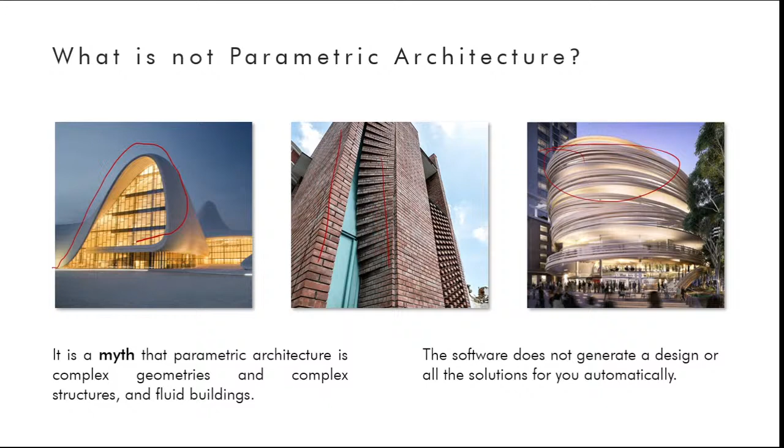Let's begin by understanding a little history here - the evolution of architecture versus other fields. We as human beings began to find shelter; architecture is as old as human beings. We started finding shelter by putting up rocks so it could protect us from harsh rain or sunlight.

Then we moved on to living in houses. We started putting up walls because we needed privacy. Then we started living in neighborhoods because we are social human beings. Once we started living in neighborhoods, the land wasn't enough, so we started rising in height, building stories over stories.

And that's how low-rise and high-rise buildings came into existence. There were many styles I don't want to get into detail here, like minimalism, brutalism, and Le Corbusian style. These are styles you all must have studied in your history classes in architecture, so let's not get into those. Let's see what stage we are at right now.

We have moved through so many phases of architecture. We got to minimalism, and now we are at complex geometries, and we have skyscrapers. But the question is, are our buildings smart?

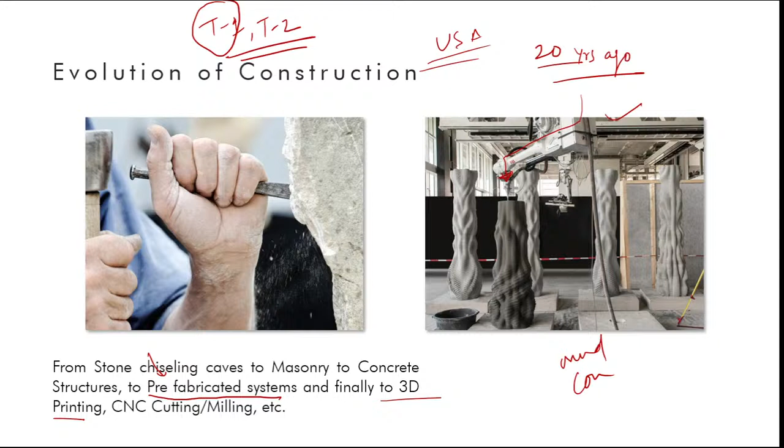To put it in generalized terms, think about how softwares and apps come out, how they are evolving. By the time I finish this webinar session, there will be multiple new apps and softwares already pushed out into the market to be tested by users. That's the pace of technology we are living in right now.

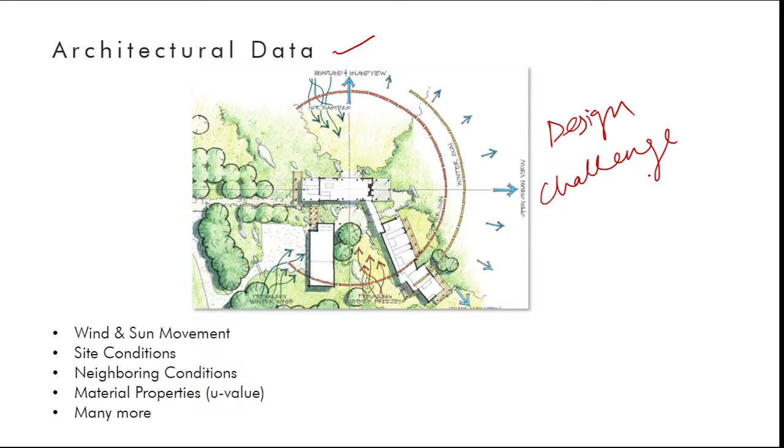So if I talk about architectural data, when we are presented with a design challenge or a problem, be it a live project or a college project, what do we do? We either visit the site, or if the site is hypothetical, we collect data. What is the data we collect? The wind movement, the sun movement, where is north, what is the groundwater availability, how is the soil bearing capacity, what is the site condition, how is the seismic activity, how do the neighboring buildings look and how are they designed, what is the visibility of the site from the road, and multiple other data.

What is the humidity? We collect all this data and begin the design process. After we have designed, when we move towards the construction phase, we start collecting data on the materials we are going to use. How much heat will the material absorb, how much will it give out, how would it perform environmentally, what is the carbon footprint, is it locally available or will it be imported from somewhere else? This list goes on and on, because architectural projects are very elaborate, as you all must know. There is a huge list of data that we collect throughout an architectural challenge or design problem.

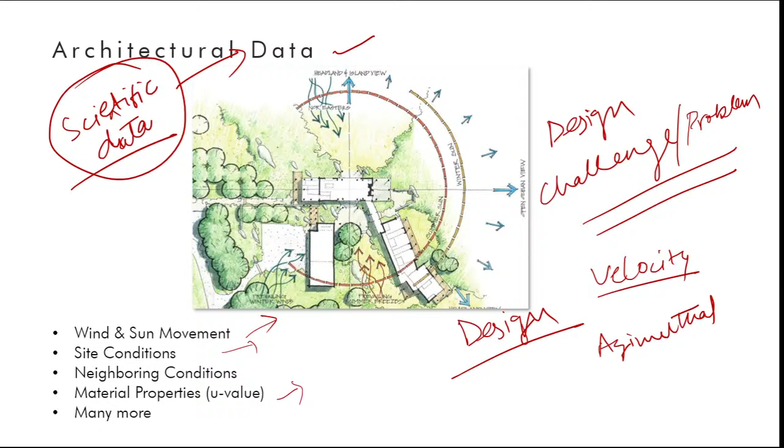So I'll circle back to this slide again. Let's understand what parametric architecture is. Parametric architecture is basically finding the simplest solution to a challenge or problem through objective evaluation of different data, like the data we collect throughout the challenge. Objective evaluation means evaluating something keeping subjectiveness aside, based on formulas and algorithms—objectively evaluating data and parameters like wind, sunlight, weather conditions, and coming up with the most optimized result. This is something really important. This is what parametric architecture is: to come up with the most optimized solution.

Optimization could be in terms of sunlight, wind, costing, or material usage. Coming up with the most optimized result is parametric architecture. Computation is generating solutions after processing this data using mathematical algorithms. Once you've done that, you spot patterns between the data, and finally you optimize your output based on all the information at hand, connecting the dots. That is what parametric architecture is.

To give you an idea, let's see what traditional practice has been so far and what parametric architecture changes. In a traditional workflow, we have a design challenge, and we collect all the data we just talked about. Then, as architects, we use our intuition, our experience, our subjectiveness, along with a list of requirements from the client, and there's some emotionality attached to it, and some psychological factors as well.

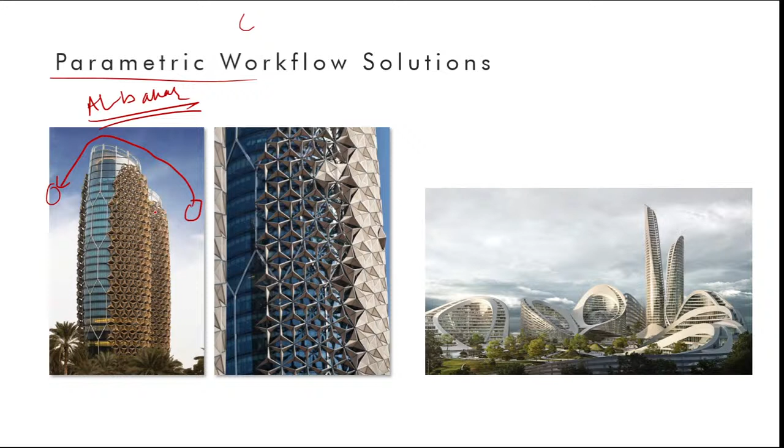Either they increase the cost of artificial or mechanical cooling, or they do something on the facade that cuts down the sun. So they simulated it and got to know which faces would be mostly exposed to the sun. So they designed a fenestration.

They designed sort of a brise soleil. So this is basically a hexagonal ring in which there are flaps that open up or close based on the sunlight. If the sunlight is direct and harsh, they close to prevent sunlight from coming in. And if it's indirect, they open up to let the indirect illumination come in. So these are called kinetic facades.

Now, I'm not saying the cost of operating this might be higher than mechanical cooling. What I'm trying to say is this is one step forward, one step towards the future. So we have to innovate this. We as architects have to take inspiration from it and innovate it further—how we can use something else, how we can make it better.

That's how cars came to be, at just first step. It was a cart, a bullock cart, a basic motor engine. Then gradually we progressed to a phase where we have luxury cars and the cars we see today. So it's an evolutionary process. Try to put yourself in that mindset that you have to evolve the entire architectural practice.

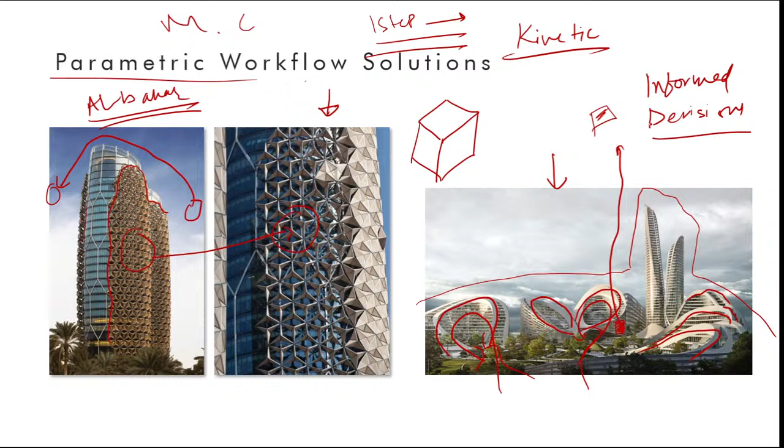Now imagine if this square area does not receive much sunlight. What the computer will do is, right at the designing phase, bring out this particular square region and tell you, hey architect, hey designer, this is not receiving the enough amount of sunlight you desired. Now it's your choice to move forward or change that. So maybe as an architect, you could plan some activity that is not very active during the day. This is how you make informed decisions—the biggest outcome is informed decisions. You are not just randomly guessing and making designs; you actually have the data to back that design.

That brings us to the last slide of this presentation, and then we move on to some practical aspects to see what Grasshopper and Rhino have to offer.

Let's talk about why architecture needs computational design. Why do we need it? There's something called multiple design iteration. I'm oversimplifying everything here—let's say this cuboidal elevation is the building. I could tell the computer to start trimming out this particular side at an angle until it reaches 60% efficiency in terms of solar radiation.

So what the computer would do is start making different iterations of this design, and it would say this is 10%, this is let's say 20%, this is 45%, this is 60%, and this is 80%.

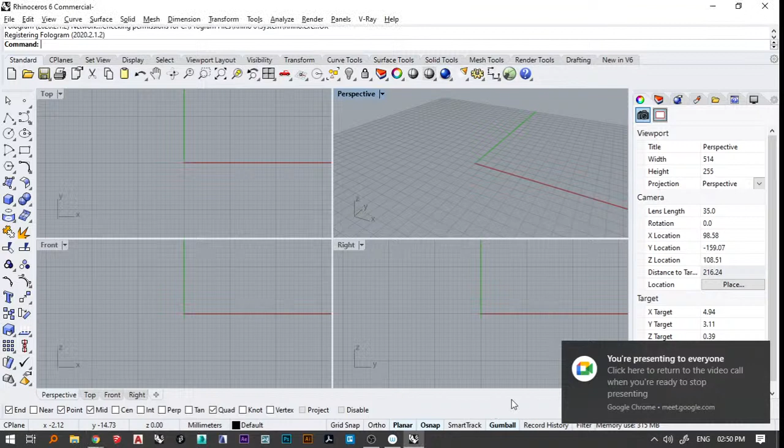So let's begin by understanding what is Rhino, why it is useful, and why should we prefer using it. What is Grasshopper, and what is the difference between other modeling tools and 3D tools and this particular tool here. So let me bring up a whiteboard quickly.

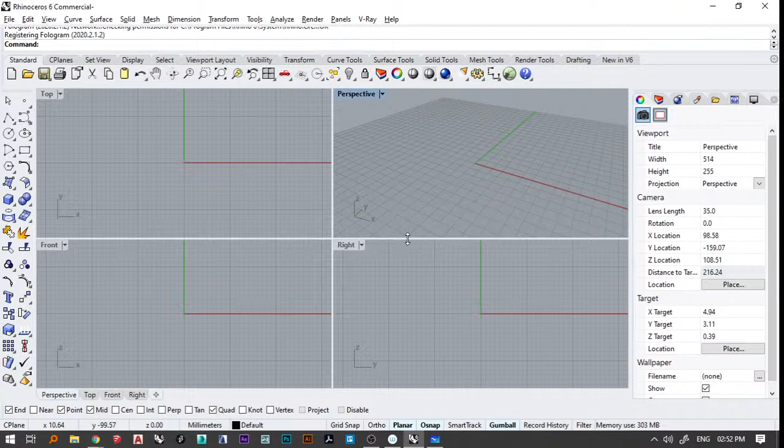These four blocks that you see - basically Rhino looks a bit complicated at first, a bit intimidating, but it is very easy because you can clearly see that we have curve here, and there are some options, and then you can also find the same options here. So basically everything is repeated multiple times - same options, same commands here, here, and here. That is why it looks a bit intimidating.

So we'll stay in the standard bar right now. These are called viewports where we visualize our geometry - top, perspective, right, and front. If you double click on any of the names, it maximizes. And then if you go to this particular point icon here and click on this arrow, you'll see multiple point options. We'll use the first and the second one.

So if you just type in point and hit enter, you can place some points on the viewport. Down here is the snap setting through which you could adjust snap just like CAD programs. So end, near, point, and all these things, and you could disable them altogether.

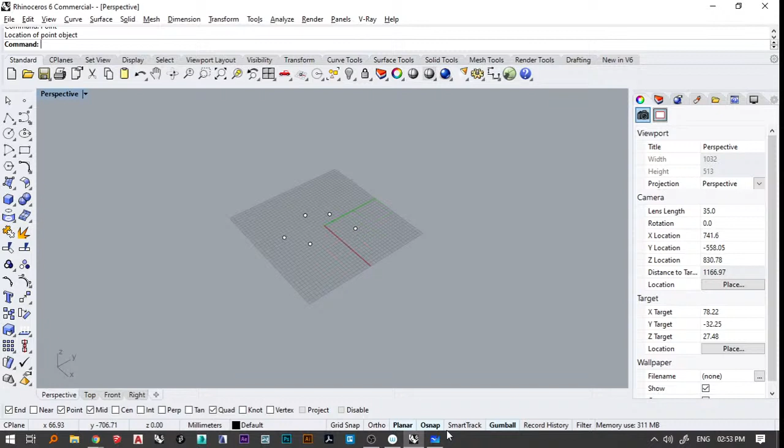Down here you see some other settings, and what I'd recommend is to keep this gumball on. Gumball is an important tool. So what gumball is, if you select something, if I turn this gumball off, you see the gizmo on the screen disappeared. If I turn it back on, whatever you select, it will give this gizmo.

So this is basically x, y, and z direction. This is z direction, this is x direction, this is y direction. You could drag, click, and drag on these arrows to move the geometry. You could also extrude them, you could also rotate it. So let's try all that out.

The second one here, and the third one here, is polyline. So just like PL entered in AutoCAD, this is a polyline through which you could construct or make a set of straight lines that are joined together. You could also type polyline for that.

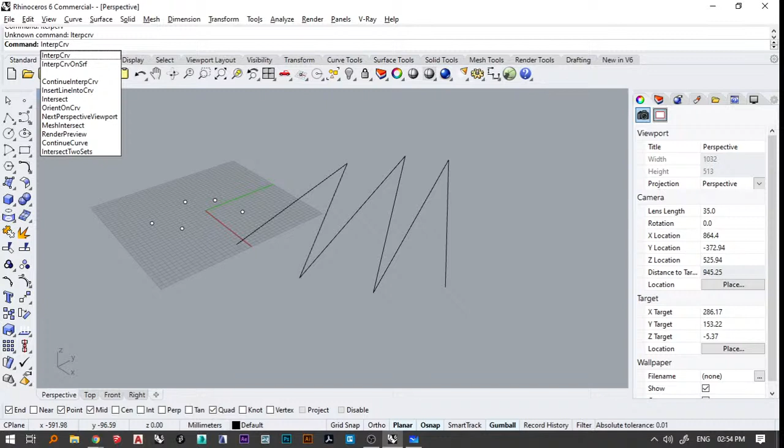And then there is something called InterpCrv, or interpolating curve. What InterpCrv does is it allows us to make some curves. So let me just make a curve here. Now you see, the fun part about this curve is whatever points I'm clicking, the curve is always passing through those points, right?

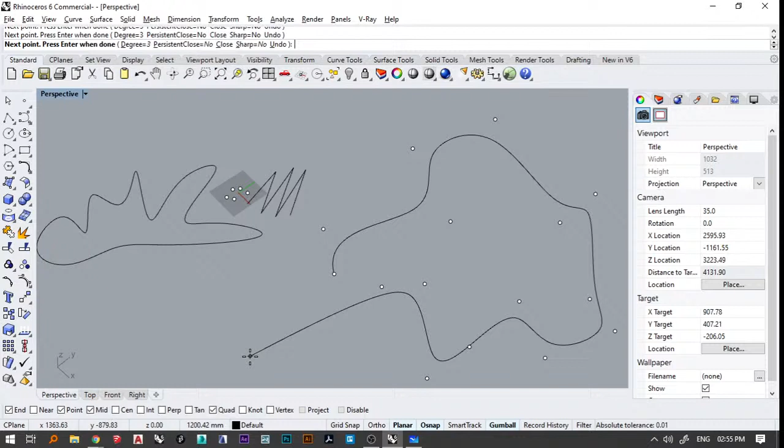And the second type of curve is NURBS curve, or instead of NURBS curve, you could just type in curve. What this particular curve does is, if you'll draw something, the curve will not pass through those points. Instead, it will be controlled through those points. So I hope you guys get the difference between a NURBS curve and an interpolating curve. Interpolating curve basically passes through the points that you make, and NURBS curve doesn't. It is controlled through those points.

Let's go ahead and explore a couple of more things before we move into the fancy technical stuff. Let's just have a look at all these things. So I would actually recommend you guys, once you are practicing after this session, go ahead and explore these options. These are some options to make circles and polygons and sort of these sphere, ellipses and arcs, rectangles and triangles.

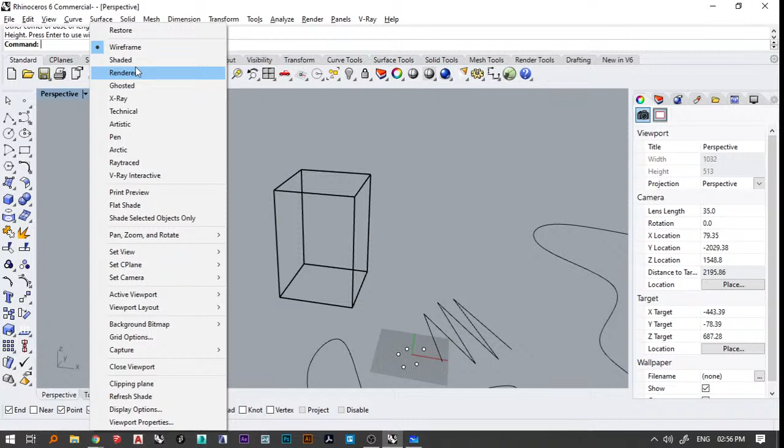So the first one here, if I click on this one here, you see I can make some 3D geometry, and we can change how this 3D geometry is looking by clicking on this arrow here, and we can change the style of preview. So we can either set it to wireframe or shaded or rendered or ghosted. For now, I'm just gonna set it to shaded.

If I talk about this particular geometry here, I can go in here and make some cylinders and make some different shapes. So let me make this. So I made a cuboid along with a sphere.

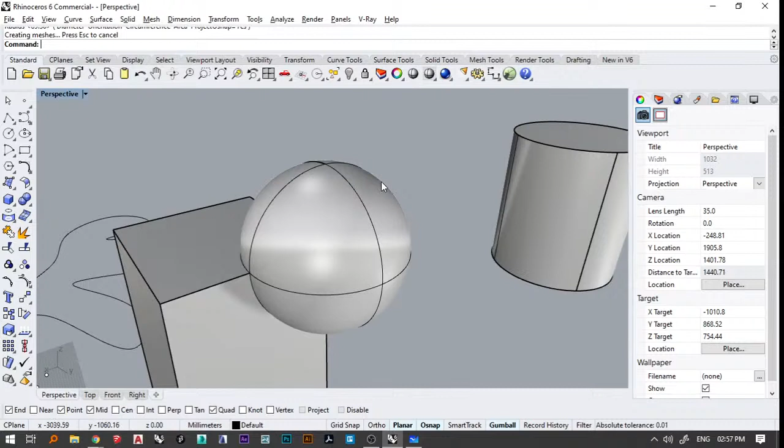So then there is some command here through which you could, right now this is a different geometry. This sphere is a different geometry, and this cuboid is a different geometry. What if I wanted to combine them together? What if I wanted to subtract this sphere from this cuboid?

So to do that, there is this Boolean difference option that I would actually want you guys to explore. This is not parametric, this is some basic modeling tool. So Rhino is a 3D modeling tool just like SketchUp or any other 3D modeling tool, but it is a bit more sophisticated. You have a bit more control over the geometries that you're making. So that is the difference between Rhino and any other 3D modeling tool. So I would encourage you guys to actually explore these tools.

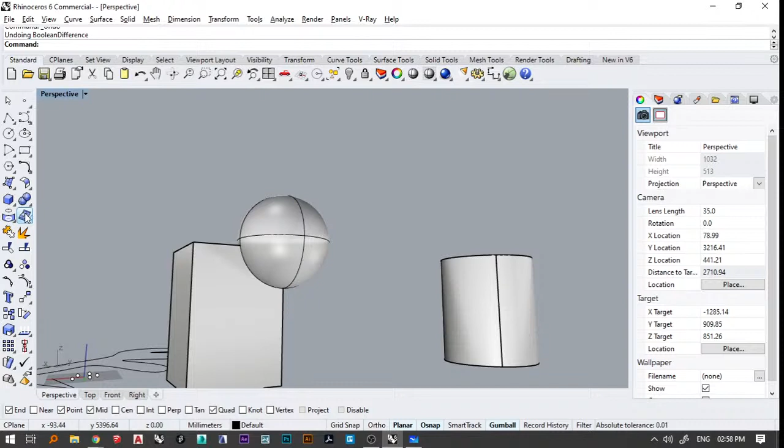So let's say if I type in Boolean difference and I select this cuboid and hit spacebar or enter, and then select this sphere and hit spacebar, you see it has kind of removed that spherical surface from this cuboid. If I press Ctrl Z, it will just undo it. And I can combine them, I can do a Boolean intersection. I would actually encourage you guys to try these out once this session is over.

Let us see a couple of interesting things first. So you can select every geometry, all the geometry, move it aside, and after selecting it, you can also hide it. In order to hide it, you can click on this light bulb option here, and if you right click on it or click this one, it brings everything back on. So I'll just hide everything so that it does not interfere with what we are making right now.

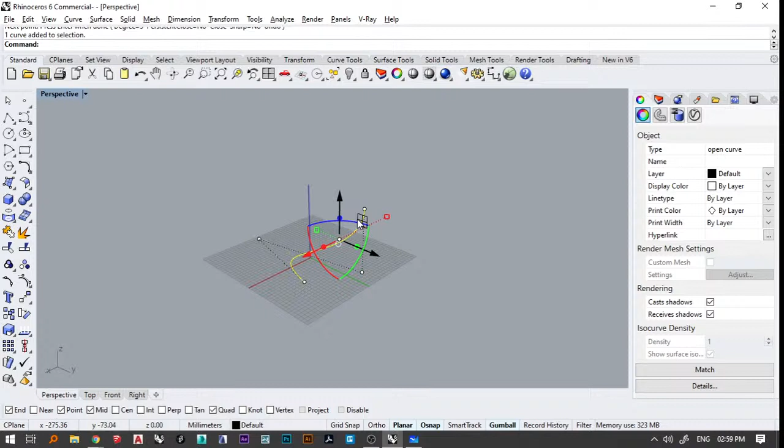So let me go ahead and make a couple of curves. This is a curve that I just made, and I'll make a copy of this by pressing and holding Alt and moving this particular curve. So now I have these two curves. What if I wanted to make a surface between these two curves?

Let's go back to the drawing board again. I'm trying to break down the complexity of what curves are and how they perform, and what is 3D geometry basically.

Imagine a surface like a piece of fabric, either you wear it like a t-shirt. How does the fabric look? It has threads that are weaved in both directions, right? So similarly, no matter whether you wear it or throw it on the couch, whatever you do with it, it will take that shape.

So similarly in 3D tools, particularly in Rhino, these threads are called - this horizontal one is called U, and the vertical one is called V. This is very important, U and V. So what if we had to make a surface between two curves?

So if this is a curve and this is a second curve and we want to make a surface between them, what the computer does is it breaks down this curve into parts and starts numbering them. The computer always starts numbering from 0, so it will say 0, 1, 2, 3, 4, 5, and 6, and similarly it will break this curve into multiple parts and label it 0, 1, 2, 3, 4, 5, and 6. Then it will connect 0 with 0, then 1 with 1, 2 with 2, and so on and so forth.

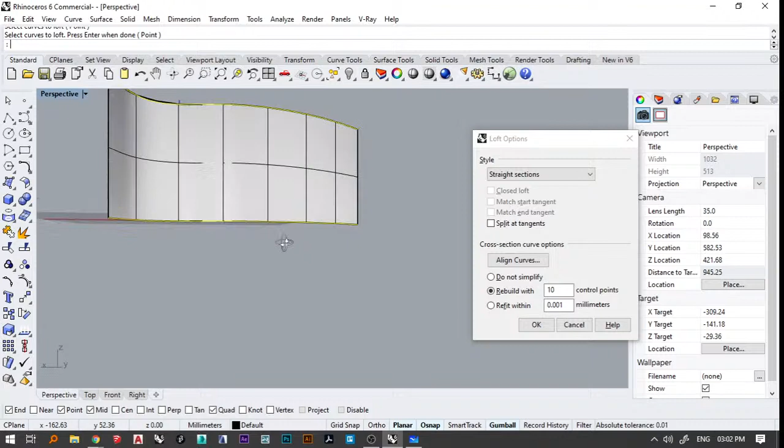So let's try to do that on Rhino. What if we wanted to make a surface between these two curves? There's a command called loft. If I type in loft, it asks me up here on top to select curves to loft. So I'll select this curve and I'll select this curve. And if I press spacebar, you see it has made divisions and joined these curves together. I'll say do not simplify and hit OK. So very easily I made a curvilinear sort of surface.

Let me go ahead and quickly make one more curve, and let's try to make something interesting this time. Imagine if this is a curve, and let me make a copy of it, and I'll change how this curve is in its form. So let's make a lofted surface between these two curves. I'll type in loft, hit enter, I'll select this curve and press spacebar, and there you have it. So you see, you can make very organic and smooth, fluidic shapes very easily in Rhino.

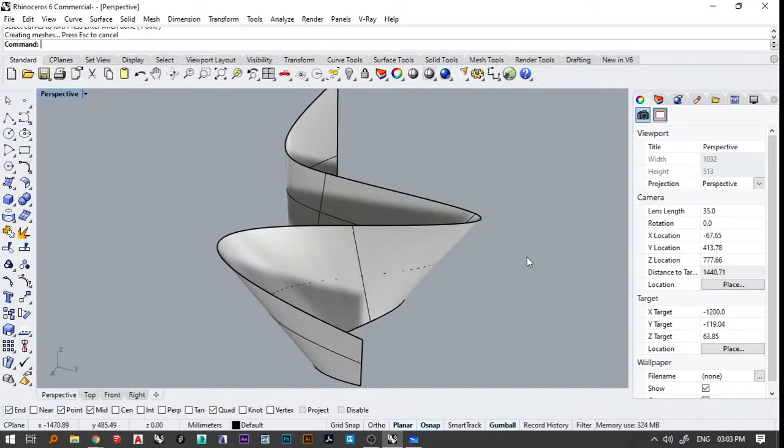But the only problem is, if I go back and select this curve and change the shape of this curve again, the surface won't automatically update, because this surface is a different unit and these curves are a different unit. So I'll have to do the loft again. And this is what changes with parametric architecture or with computational design.

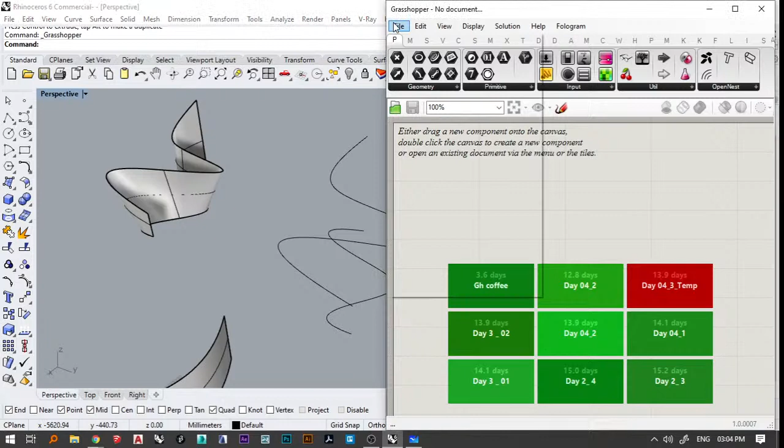So enter Grasshopper. Let me go ahead and quickly launch Grasshopper. So this is Grasshopper. Let me introduce you guys quickly to what Grasshopper is. This rectangular boundary that you're seeing here - let me increase this pen size - this is called the canvas.

So you draw or you make everything in here. Grasshopper is a visual scripting software, a plugin that is very tightly incorporated with Rhino. So whatever you make here on Grasshopper, it is previewed in Rhino.

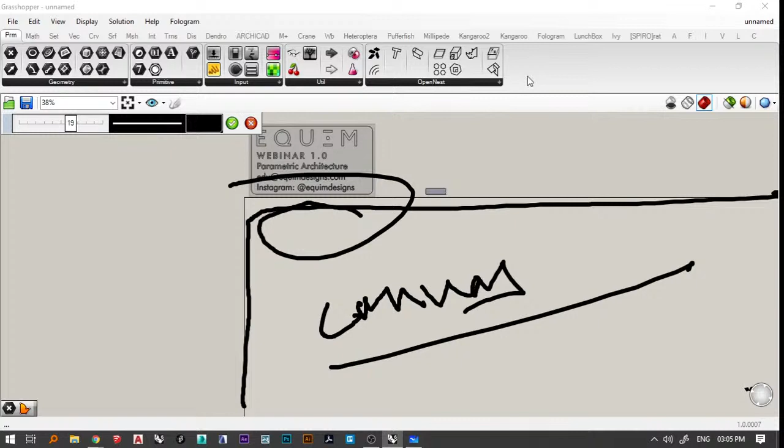Where my cursor is right now, these are called components, and you might not see this many components on your screen because I have many plugins installed. That's why I have these many components. Let me go ahead and drop in a component here.

You can double click anywhere and type a name of the component, say point or a line or anything, or you could drop it from here. So if I double click and type in point, it will bring up the same thing.

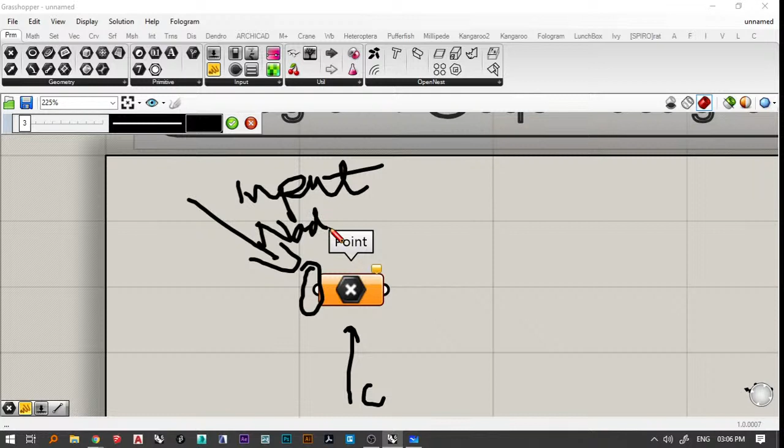Now let's understand what this is. This is known as a component. Component. This here is input node, and this here is output node. So we always connect output of one component to the input of another component.

And it will all make sense in just a bit. So I'll just keep it somewhere here, aside, and I'll also move this geometry aside and hide it.

So what can we do in Rhino? What can we do in Rhino and Grasshopper combined? So if I make a couple of points in Rhino itself, let's say these are 4 points that I just made in Rhino.

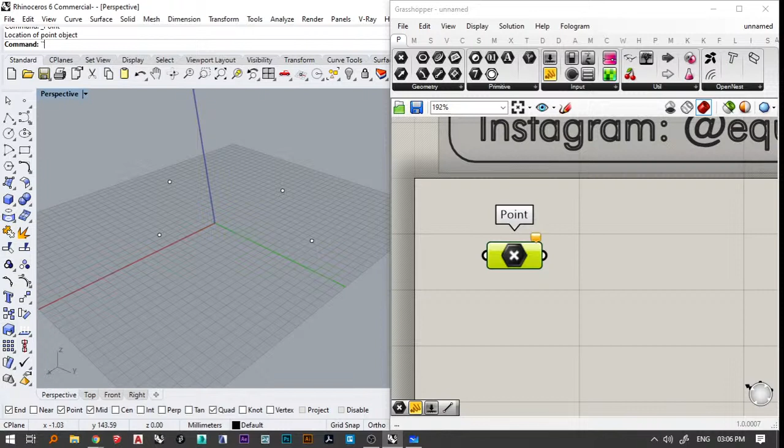Now there is something that means with the color of the component. If the component is orange, that means the component is empty. You can click on this balloon here to see what is the error. So it says floating point parameter point failed to collect data, because we did not specify any point in this particular component. That's why it's orange right now.

So all these black icons that you see here, they are used to reference something from Rhino to Grasshopper. So let's bring these points here in Grasshopper. I'll right click and I'll say set one point.

As soon as I click on set one point, the Grasshopper screen disappears. Now I can select a point here, and as soon as I do that, it will bring up the Grasshopper screen back again.

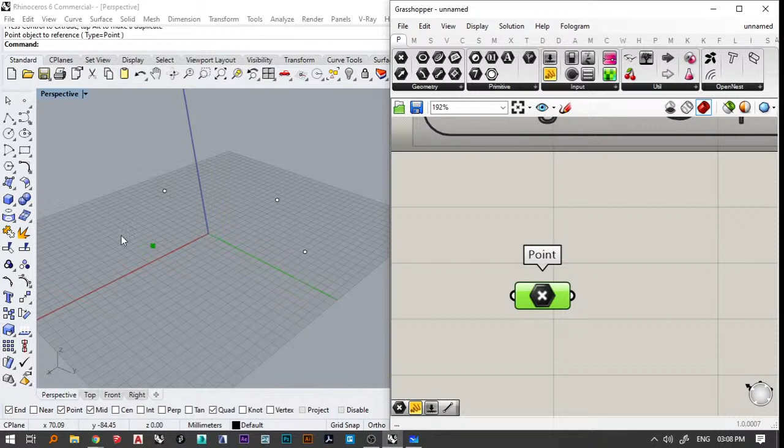So this is a point. Now you see there is a green mark because this component is now green in color. That means it's running fine, it has some data in it. And if I select it, you see this point here turns green.

And I can move this point in Rhino, and it will automatically update the position of Grasshopper's point. So let's see what we can do out of it.

So there is something called panel. Panel is used to check the output of these components - what is it giving? Because we cannot see any geometry preview here, right? We can only see it in Rhino. So let's see what it has in it.

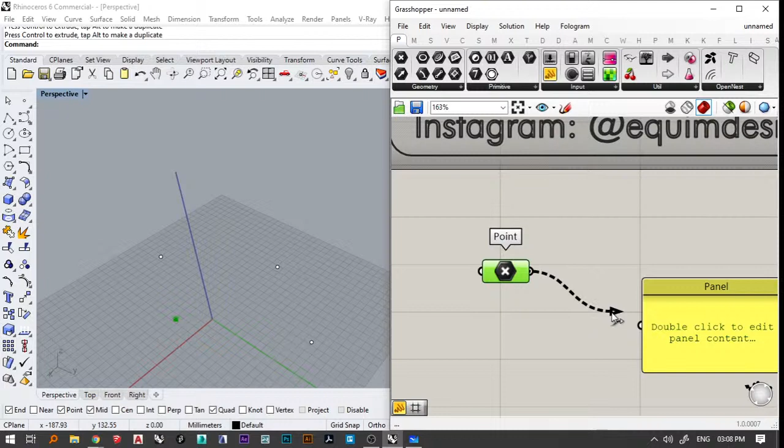If I drag a wire out of it, so you just click and drag, a wire comes out. So if you connect it like this, it says referenced point. Why? Because we referenced one point from Rhino.

Let's quickly reference another point and make a line between them. So I'll again type in point, right click, set one point. I'll select another point, this one.

Okay, let's also check the output of this one. It also says referenced point. So this one is the green one here, and this one is the green one there. So let's make a line.

So if I double click and type in line, I won't use this black one because black components are used to reference something from Rhino. I'll just use this line here.

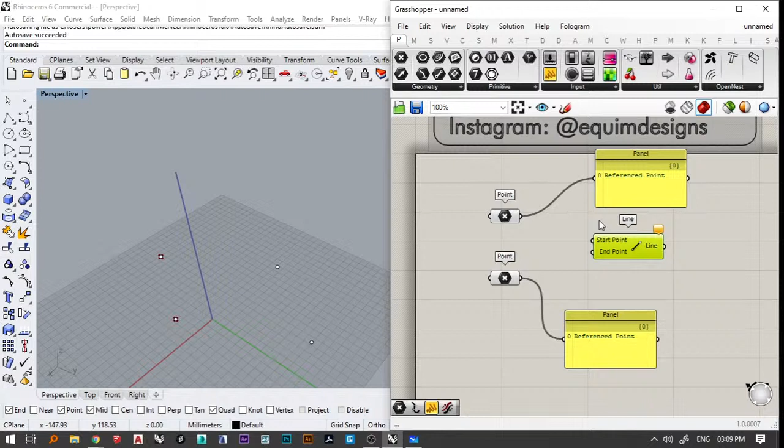Let me go ahead, and now you see what does a line require. What does a line require? It requires a starting point and it requires an ending point, right?

So I want to make this point as the start point, so I'll just drag an output and connect it here. And I'll drag an output from here and connect it here. As soon as I do that, you see a line is being made, right? A line on Rhino, I can see a line on Rhino.

And again, if I move this point in Rhino, the line also automatically updates based on the position of these points. Correct? Let's check the output.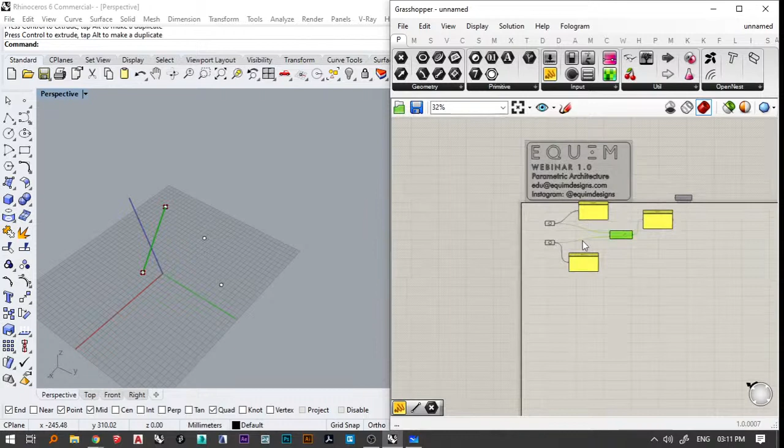If I connect this line here in the panel, you see it tells me that it is a line that has a length of 196 units or 196 mm. Why mm? Because down here on Rhino, the unit is set to millimeters right now. Okay, so this is a line. I made a line. That's cool. Let's try to make some curves.

So I'll just type in point. Now again, it would be very tedious if you had to select all the points manually one by one. So you can right click and select set multiple points. As soon as you do that, you can select multiple points in one component. I selected these 2 points, and when I hit space bar, both get highlighted in green as soon as I select this component. So this one has the first point, this one has the second point, and this one has the remaining 2 points.

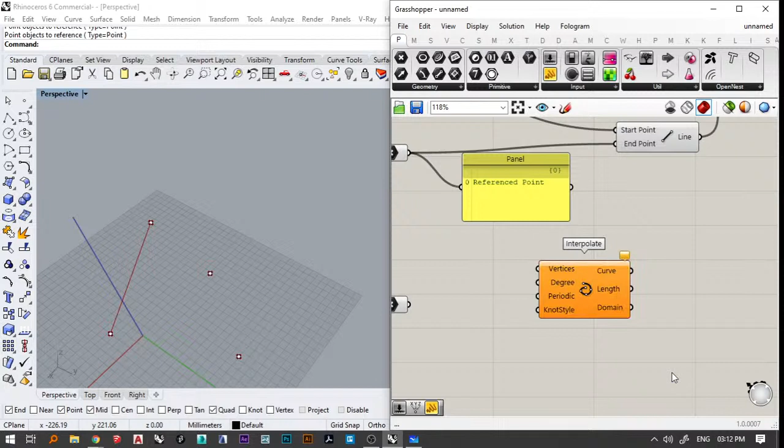Let's try making a curve between them. In order to do that, let's make a curve. Let me type interpolate. As soon as I type interpolate, I get this curve. If you hover over it, it says create an interpolated curve through a set of points. So now we have some points, right? We have like 4 points with us.

So how about making a curve between them? What we'll do is connect this first point in the vertex here, and as soon as I do that, this turns red. Red means there is some error, something wrong with the component or the input. If I click on this balloon, it says insufficient interpolation points for a curve. That means we only gave it one single point right now. That's why it turned red. It cannot make a curve between one single point, right? It needs at least 2 points to make a line curve.

So let's connect this second point as well. I'll turn the preview of this line off by middle clicking on it and choosing this blindfold icon. But you see, as I try connecting the second one, the first one automatically goes away. If I connect this first one back, the second one goes away. So to connect multiple outputs into one single input, you press and hold shift. As soon as I do that, a plus sign appears on my cursor.

Yeah, exactly. Very nice. So the first one is an interpolating curve. It will always pass through the points, and the second one is a NURBS curve. It will be controlled through those points.

Let's try making a surface between them because we learned to make a surface between two curves. Let's try doing that in Grasshopper. If I double click and type in loft, it is asking me for curves. I want to make a surface between this curve, the one you see in green right now, and this one. So let's connect this curve in here, press and hold shift and connect this curve. As soon as I do that, I have a surface.

Now when I'm changing the location of the points, the curve is getting updated, and at the same time, the surface is also getting updated. If I check the output, it will say an untrimmed surface. That is the power of computational design. You never lose control. Just like layers in Photoshop, if you work in layers, the data is not destroyed. Similarly, in a way, we work in Grasshopper.

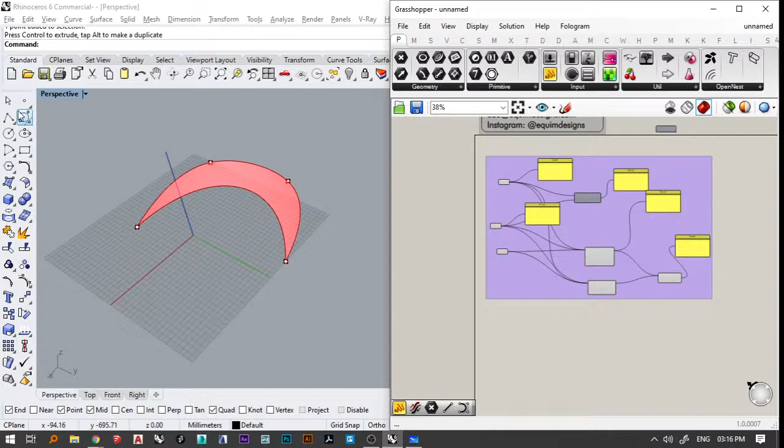So let's try to make something more advanced. Let me go ahead and make a curve in Rhino itself. Say this is a curve. I'll make a copy of it and alter the shape a bit. I'll make a second copy of this as well. So let's make a lofted surface between three curves this time instead of two.

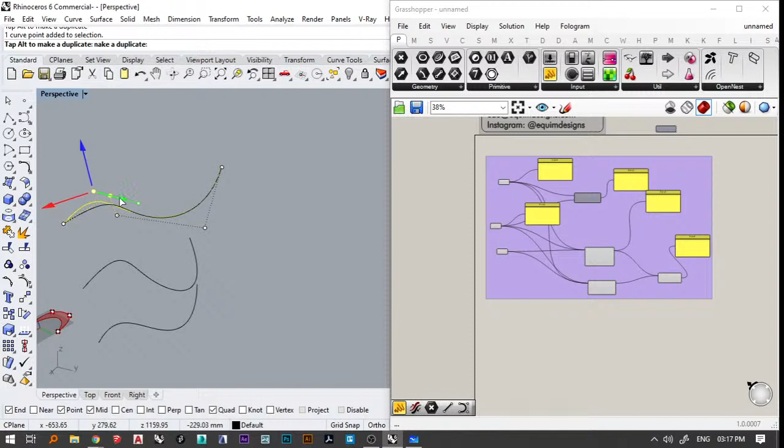Okay, let's try making a surface between these three curves. In order to bring these curves into Grasshopper, I'll double click and type in curve, and this black component appears. I can use this to reference curves from Rhino.

I'll right click and say set one curve and select this curve. You see this particular curve is selected. I can press Control C and Control V to make a copy of this same component. In this one, I'll say set one curve and select this middle one, and in this one set one curve and select this one. I could also have done set multiple curves and selected all at once, but for the sake of this example, I'm using three different ones.

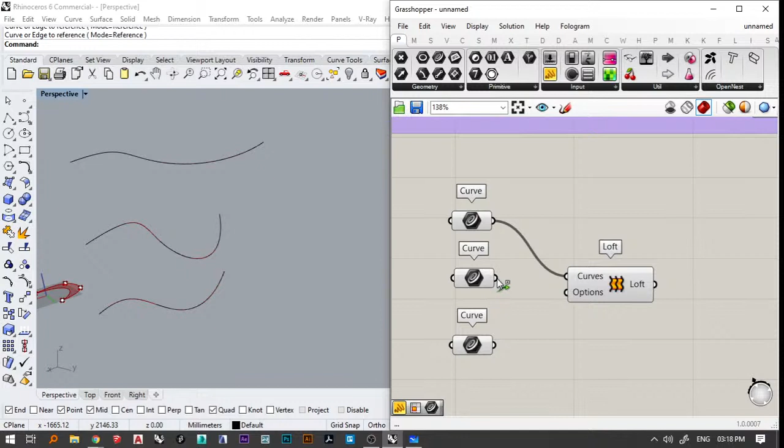So if I double click and type in loft, and connect this, then press and hold shift and connect this and this, you see I have a very smooth fluidic shape. Let me change the preview style a bit. Fluidic shape in here.

Now if I select these curves and change the curve, the surface automatically updates. So no matter how many times I change something, it will automatically update because I made an algorithm like that, right? I could even change the position of this entire curve.

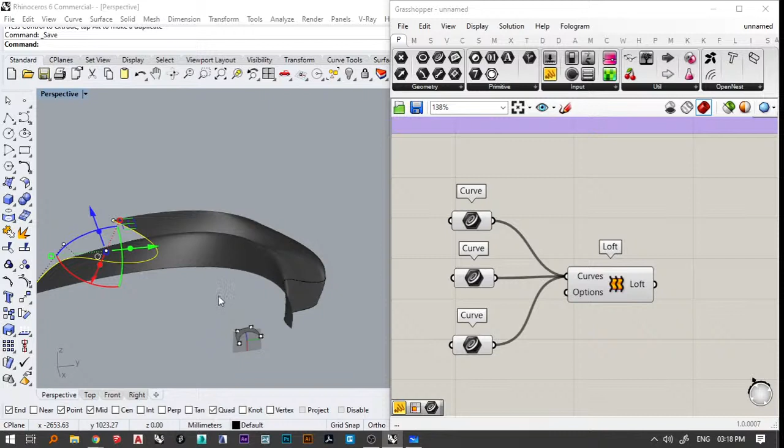Okay, let's move forward and see what else can we do in here. If I check the output here, you see it says an untrimmed surface, right? What can we do out of it? How about...

Say we have a surface like this. How about dividing it into panels and then doing something on each of these panels? Let's try doing that.

So let's divide this particular face or surface. In order to do that, I'll double click and type in surface here. I'm just trying to sort the script - it's a left to right approach. You see, it can get messy pretty quickly if you do not keep organizing it nicely, because there are so many wires that come from here and there. So keep organizing your scripts. I'll connect this loft into this black component here. Now I have this surface here.

Let's divide it. In order to divide, there's a component called Isotrim. What Isotrim does is it requires a surface that it can divide, so I'll connect this surface here. And then it requires the information of how to divide it - how many divisions, how far from one another, and basically how to divide it.

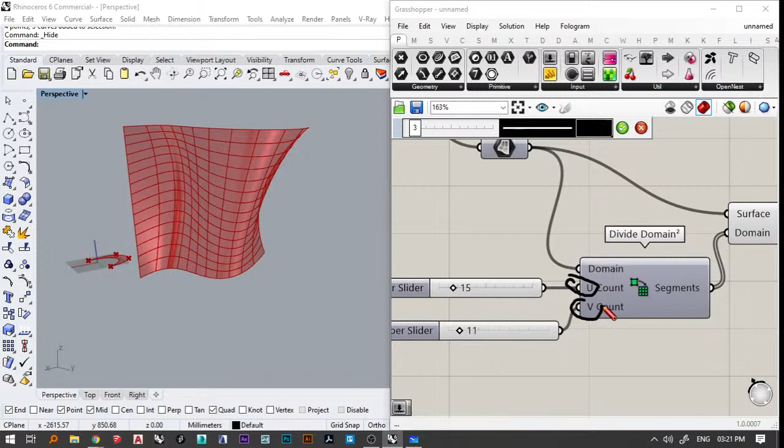If I zoom in, you see if I change this number, I can adjust the number of divisions on this surface. So let me say 15 by 11. Again, there is U count here and V count here, as we learned before. Also, this is a kind of a thumb rule: Isotrim and divide domain square, they usually go in together, always.

Now if I check the output from here, it was one single surface, right? This entire surface was one single surface. Now if I check the output from this Isotrim, you see I have 165 surfaces. Why 165? Because 15 into 11 is 165. So now it is no more one single surface - it is rather 165 individual surfaces. So we just divided this surface.

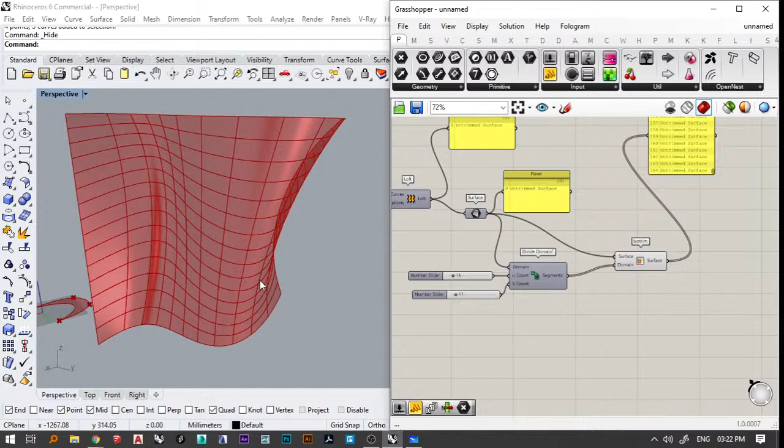Okay, let's move forward and see what else can we do here. Right now, we do not know what is the center point. Let's say if I draw, let me change the ink color and draw this one, a blow up of this one. Let's name it, let's say 21. So this is 21 - we don't know what is the size of this, right? We also don't know where is the center point.

And we also don't know what is the normal direction - the normal direction is basically the perpendicular direction. So the geometry could be oriented in any way, right? The entire panel could be oriented in any way, so we do not know what is the normal direction as well. So in order to get that information, there's a component called evaluate surface.

Let's go back and use this component. So if I double click and type in Evaluate Surface, now you see it is asking me for a surface and a point. So I'll connect this surface here, and there is something called an MD slider.

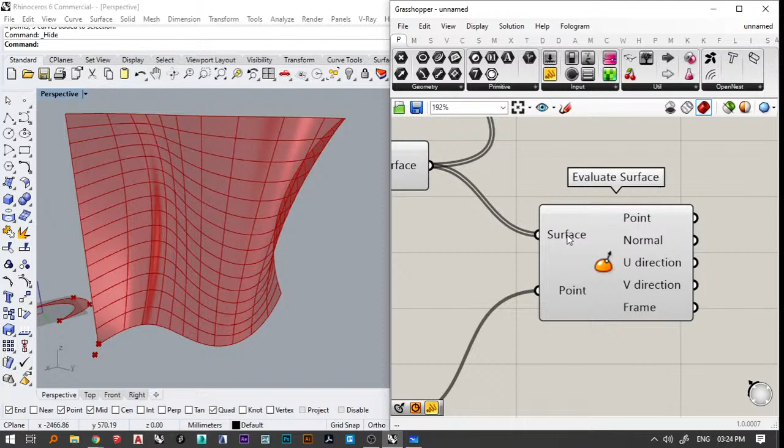I'll connect this MD slider into this point. And what I'll also do is right click on this surface and click on reparameterize - I'll explain what reparameterize means in just a bit. So always remember that MD slider and evaluate surface go together, and you always reparameterize it. Always, this is a thumb rule. You always reparameterize it.

So now let's understand what reparameterizing is. Reparameterizing is basically nothing complicated. Imagine if you had a rope, and the length of this rope starts from 0 and goes up till 20 units. So somewhere here in the center must be 10, somewhere here must be 5, and somewhere here must be 15.

So now if I reparameterize this surface - let's call it a rope - what it will do is take the entire rope, and it will take the same length of the rope. It won't change the length of it. It will only change these numbers for us to make it easier.

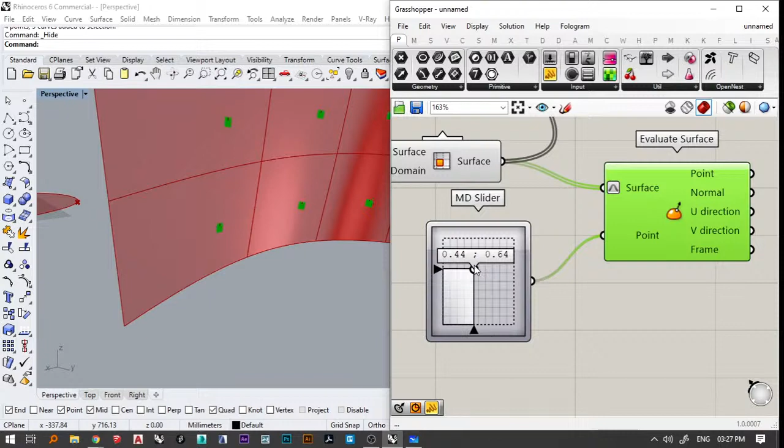So when I reparameterize it and connect an MD slider, you see this MD slider goes from 0 to 1 comma 1, and based on its location - let's talk about this panel here - if I bring it here, you see the point comes right at the center starting point, and then I can adjust where it goes through this particular graph. So this is what reparameterize does.

Let's move forward, and let's make some circles on this particular surface here. So in order to make some circles, what we can do is double click and type circle. Again, this black one would be used to reference something from Rhino, and this one would be used to make something in Grasshopper - so I'll use this one. Now it is asking us for a plane and for a radius.

So what does a circle need? If we have to draw a circle, what does it need? It needs a center point, and it needs a radius, right? So that is what it is asking us, a center point and a radius.

So Evaluate Surface is giving us points, the center points, and the position of these center points can be controlled through this MD slider here. And if I actually go ahead and check the output from this point, you'll see these are coordinates basically - points have coordinates, right? X, Y, Z coordinates. So that is what these coordinates are.

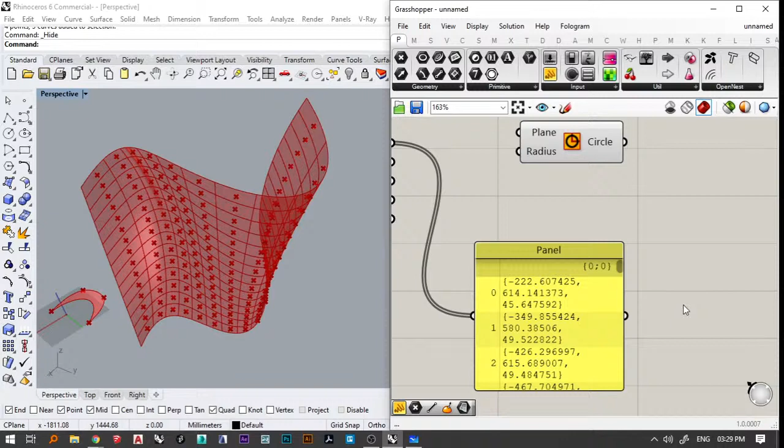So now irrespective of length and breadth, we can make some points on these surfaces without caring about how big the surface is, how it is oriented in 3D space, how it is performing in 3D space. We can just directly use Evaluate Surface. It makes our lives easier.

I'll change the number of divisions a bit. Okay, this looks fine for now.

Okay, so if I connect this point here, and double click and type in 15, and connect this radius here—probably 15 is a very small number. Okay, so now you see it has made circles at each of these points, right? It has reduced our labor, and it has made these points at each of these center points.

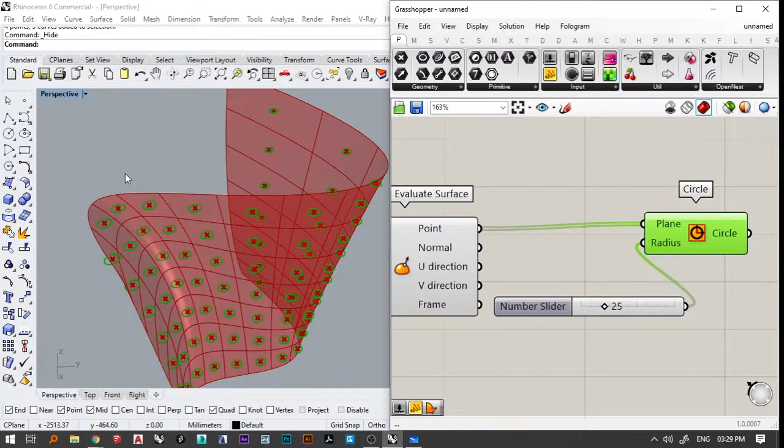What can we do further? What can be done further? So right now all of these circles are intersecting this surface. They are not on the surface, rather they are intersecting it. So how do we change that?

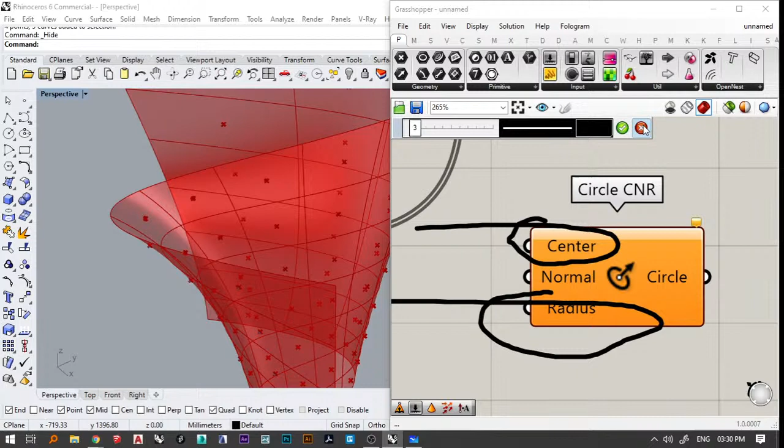So I'll just select it and turn the preview of it off. There's something called Circle CNR. What Circle CNR means is it requires a center, it requires a normal direction, and it requires a radius. So we already know what center is, we already know what radius is. Normal is basically the direction.

So you see evaluate surface here is giving us the normal direction, so we can connect this normal here directly. So if I connect this point in center, if I connect this normal here, and connect 50 in the radius, let's see how that looks.

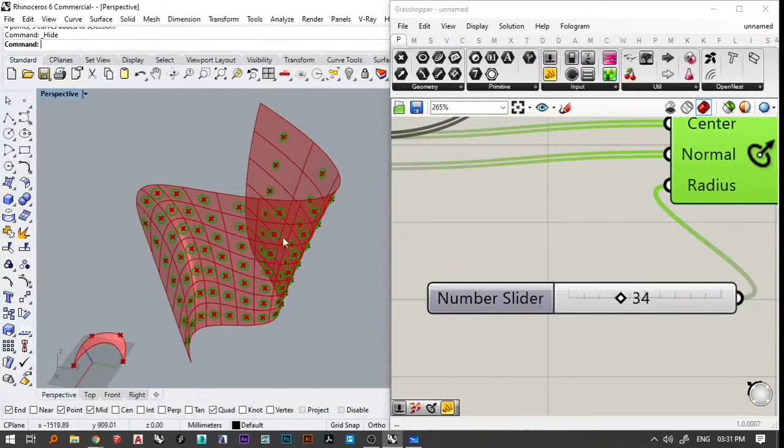Okay, that's a bit much, so I'll reduce it. So now you see that I have very easily drawn circles that are right on this surface, laying flat. And again, if I wanted to extrude them, I could simply use a command called extrude.

And I can connect this circle in base here, and in direction I could give it a direction, so I'll just use the normal direction. Normal direction is basically 90-degree from this surface.

Normal, basically 90-degree from this surface. I'm getting a normal output from this evaluate surface. I'll use this only. So there is something called amplitude. If I use amplitude and connect this normal in vector here, and connect a unit of 20 and connect this vector in direction, I can very easily extrude these circles into cylinders.

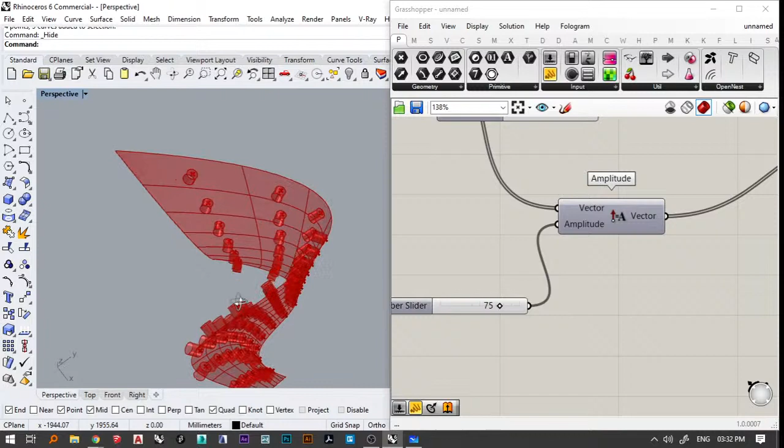Let me change the preview style, and I'll give a quick recap here. I know in the beginning it is a bit complex to grab on to Grasshopper, but once you get the algorithm, it's fairly simple.

So this normal is basically giving me the direction of the normal—what is the direction of the normal at this particular surface here. And this amplitude is controlling the length of that normal, how far it should extrude. So you see I can control the length from here, and this is extrusion.

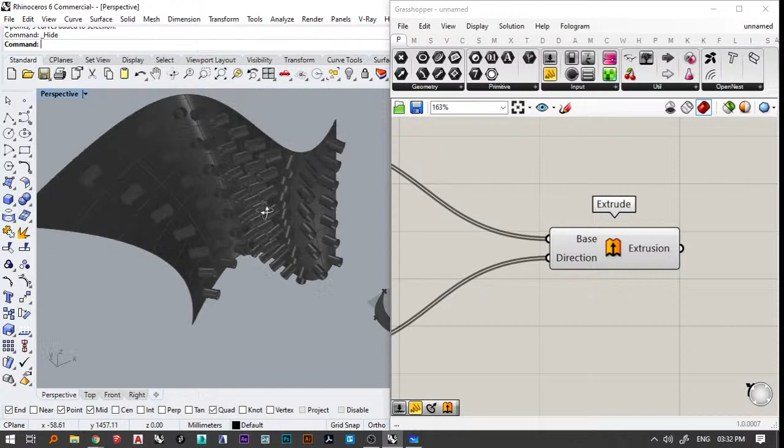So the fun thing is if I change the preview style here, and if I turn all the geometries back on, and if I go back in Rhino and change the shape of this curve—you see, I'm going back right to the first stage, and as soon as I change the shape of the curve, everything automatically updates, from cylinders to the shape of the surface, everything automatically updates.

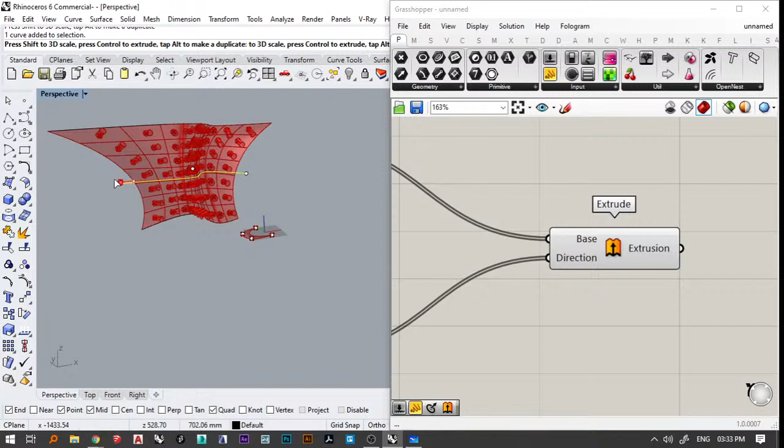So let me show you how easily I can control it, and I can always go back and change the number of divisions. So if I change the number of divisions, you can see how the number of circles automatically increase, right? So this is the power of computation.

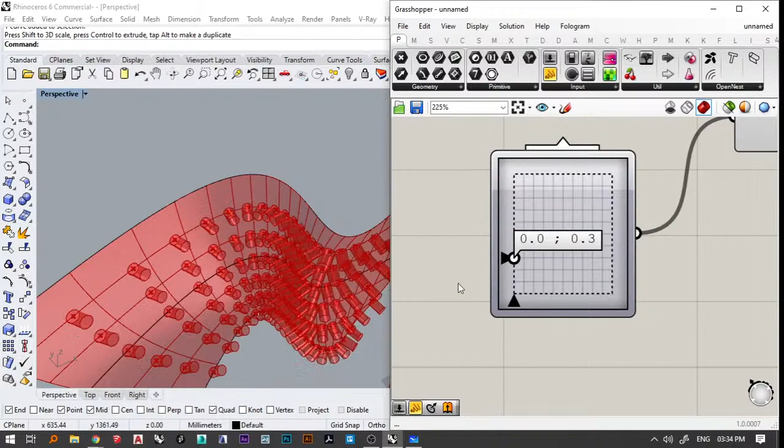You never lose data. You can always go back, change anything. I can move this MD slider to change the position of the center point, and I can move these cylinders here and there. Or I could go back to circle and increase its radius.

I could change how this particular number slider operates. So let me give it 150. So if I plug 150 here, you see I can change how far they are getting extruded, right? So this gives us an extraordinary power.

Now imagine this was a facade. I'm not—I mean, this is very early to move to facades, but imagine if this was a facade and you had to design some openings on it, circular openings on it—you could do that through this.

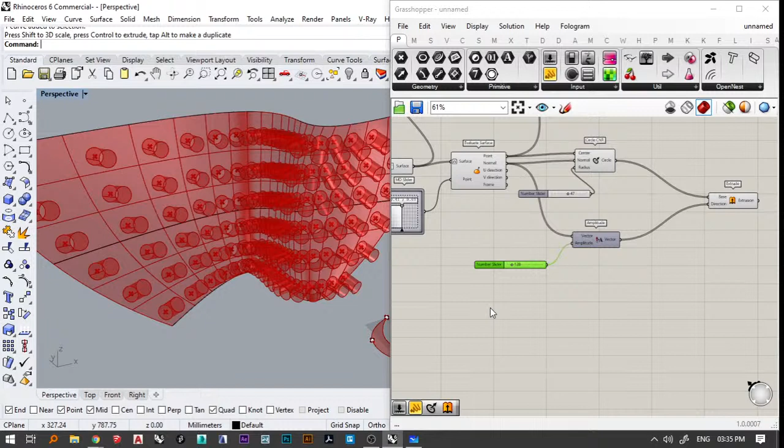Let's make it into a cone. So in order to make it into a cone, I'll double click and type in cone. So if I type cone, I'll turn the preview of this extrusion off. So it is asking us for a base, it is asking us for radius and a length.

So if I connect this circle in base and I connect this radius 47 in radius here, and in length let me say 150, and if I connect here, you see I have cones on each of these panels.

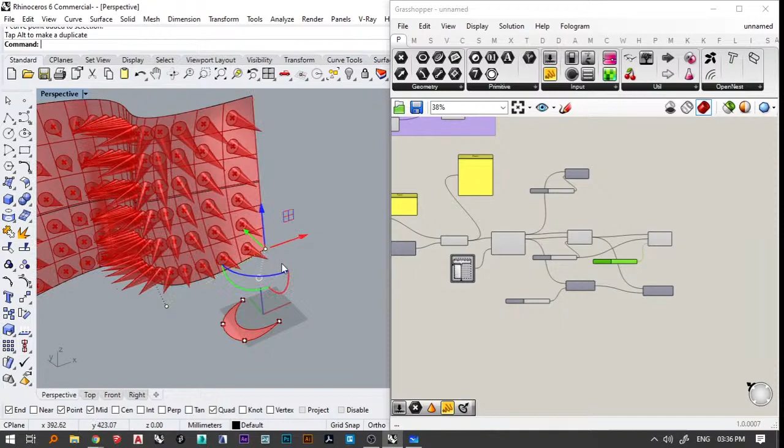So you can clearly see that the computer is not automatically making it for us. In a sense it is, but we are telling it how it has to make whatever it has to make. It is not automatically doing anything. So that's a kind of myth - people think parametric architecture will give you design solutions automatically.

Okay, so we have the surface here. What else can we do? We have these cones, what else can we do? Let me go back to Rhino, and there's this called surface. If I hover over it, it says surface from 3 or 4 points. I'll choose this one, surface from 2 points, rectangular plane, corner to corner. I'll make a plane, okay.

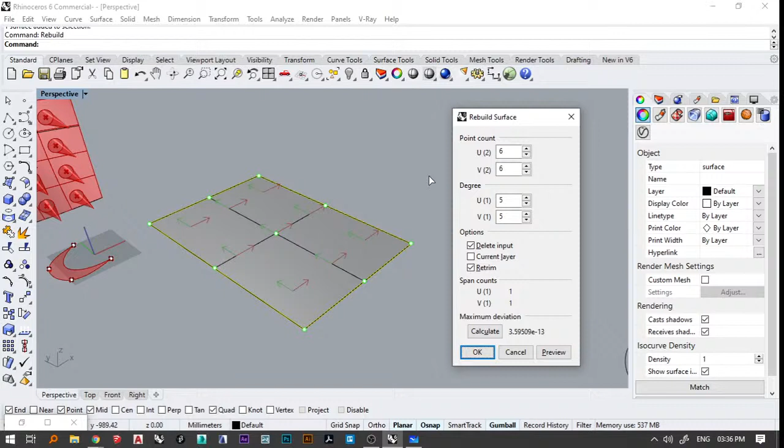If I select this plane, I'll minimize Grasshopper. If I select this plane and type in rebuild, I get this dialog box in which I can control how many U and V divisions should be made. Let's say 6 by 6. And if I hit OK - for Rhino 6 users, you press F10, for Rhino 5 users, you type in points on. So you see it brings all the division points.

And now I can select these points and move them up and down. So very easily I can make some very organic shapes, very fluid organic shapes. So you see I made this very organic shape very quickly in Rhino. It would take ages to make something like this in SketchUp.

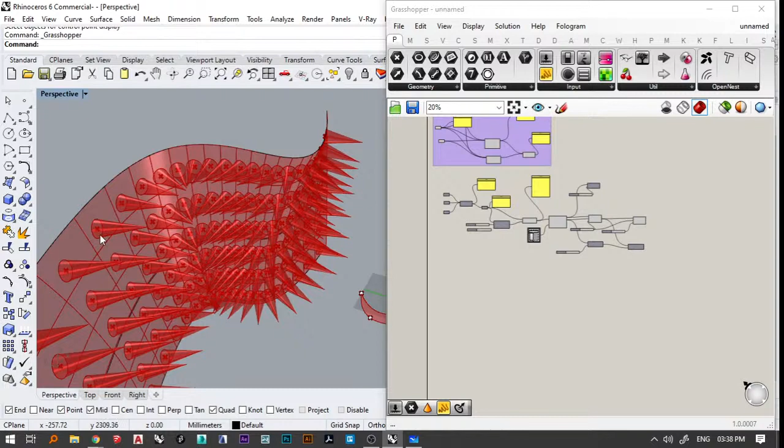So let me bring Grasshopper back. And now we have made a working algorithm to divide a surface into panels and to make cones on it, or to make circular extrusions on it. What if we wanted to do the same on this surface? So it's very simple - what you can do is double click, type surface, right click, set one surface, select this surface. I'll hide everything in Rhino. And there you have a surface referenced in Grasshopper.

And we could directly just plug this surface here, and the entire algorithm would automatically be repeated, and we'll have these divisions on this particular surface here.

So you see, if you develop an algorithm for one building, you could apply the same algorithm to multiple buildings, or if you develop something for a small facade of a building, you could apply that to multiple buildings, and then again you could go ahead and tweak it to change how it looks to suit your needs. So that is basically the power of computation, and that is why it is very much needed right now.

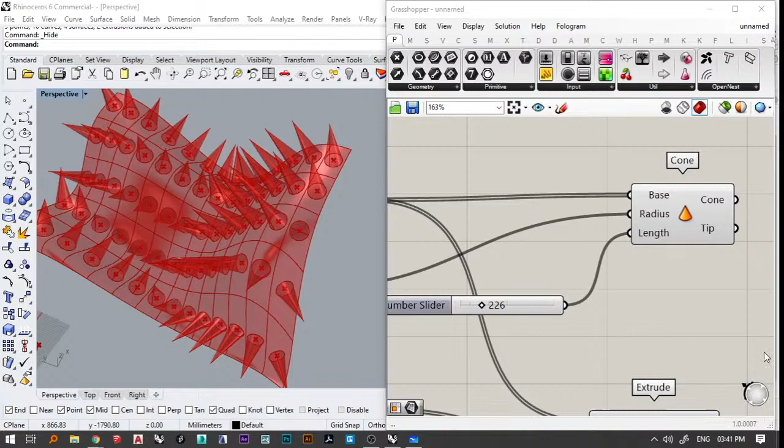What if we wanted to make changes in the first surface without altering the second, or make changes in the second surface we just made without affecting the initial one? What you can do is copy and paste this entire script, select it, Control C and Control V, and plug in any surface here—it would repeat all the same operations on that particular surface.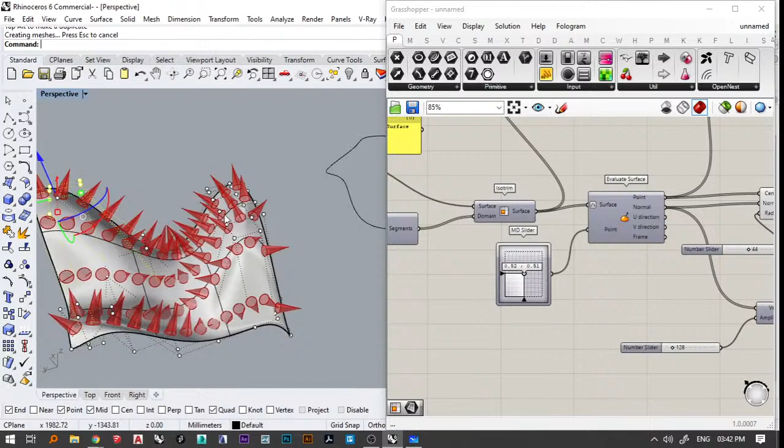Or if I go back in Rhino and select this surface, let me turn the preview of this one off. If I type in points on or press F10, I can still go back and edit these points. You see all the cones and everything automatically updating—I'm making changes to the initial surface and everything is updating.

Can the extrusion made here, normal to subdivision, be a function of the area of the same? Yeah, definitely—so instead of giving a length here, you could use area and use that area as amplitude.

Shravan, then Yogesh asked about Rhino support for BIM. Rhino does not directly support BIM, but in Grasshopper you can directly integrate to ArchiCAD or Revit, so you can do the entire BIM workflow through that.

Okay, so let me go ahead and—excuse me, sir, yep. I wanted to know how would we incorporate climatic data or any other data with Grasshopper, because it is definitely giving us numbers, but how do we incorporate it with that data so that we know where to go? Sure, I get your question, Abhinav.

Right now what we've explored so far is just understanding the interface, how things are connected, how you start making geometries on Rhino and Grasshopper. Parametric architecture in Grasshopper itself is very elaborate—there are plugins like Honeybee and Ladybug for climatic analysis and other types of analysis. It's a complex task requiring some basic understanding of the tools first: creating geometries, learning how lists and data structures are managed, and then moving on to climatic analysis. We can perform all sorts of climatic and structural analysis on Grasshopper itself.

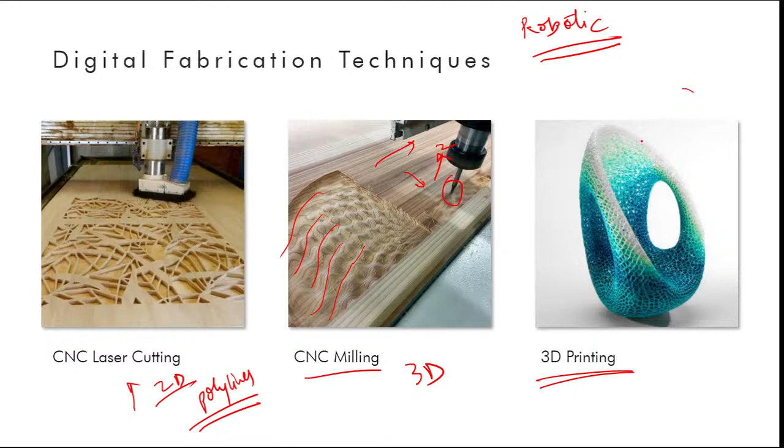So 3D printing - if we talk about this chair here, when a person sits on it - this is a 3D printed chair, and it's not a conceptual image, it's a real image. When a person sits like this...

The most amount of pressure is exerted in this area. These colors you see are not merely for aesthetic purposes - the darker the shade of blue, the higher the compressive and tensile strength of the material, and as you move towards white, the strength reduces, thereby reducing the cost of material.

That's how this chair was fabricated, and it wasn't fabricated in one single piece - it had 5 different pieces. This piece was made first, then this, then this, then this, and then the top piece was made, and they were assembled together. That's how you evolve your processes.

Let's move forward to something called waffle structure. To talk about waffle structures, let me open up a Chrome window first, then head to Instagram.

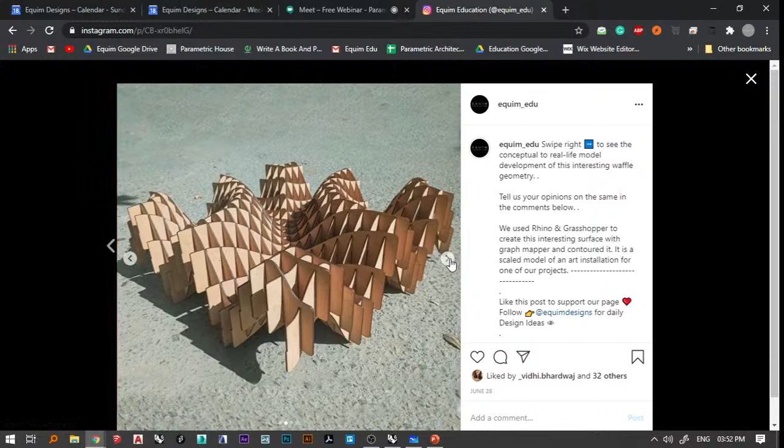Okay, so this structure that you see here is a waffle structure that we fabricated in one of the workshops. How was it made? How is this particular structure made?

A waffle structure is made like this: let me bring the slideshow back. This shape was basically designed on Rhino and Grasshopper, then divided in X and Y directions, or U and V directions - just like we used Isotrim. Each of these curves was extracted, then laid flat on the ground, with some slits made so two different objects can get attached. That's how a waffle structure works.

So you can easily break it down. It's all about creating complexity with simple things. A waffle structure is very simple, but you see this structure looks very complicated, right? It's all about creating complexity through simple surfaces or simple things, and that's how elegance is created.

When you see buildings by Zaha Hadid and other big architects, the complexity is basically created through these simple techniques, with repetition of one single element, probably one single surface entirely enveloping the entire geometry. That's how this waffle structure was made.

So what are these sheets? These sheets can be unrolled. If you look at the camera, here's a piece of paper, and I can lay it flat on the ground, I could also rotate it, flip it like this, and now I have a pipe.

And this pipe could get attached to another pipe, and then another pipe, and all these papers could be of different dimensions. So let's see how that particular structure was made.

Let me clean all these things. So if I talk about this first strip here, if you unroll it, it will look something like this.

And these tongues that you see here are basically for riveting. This tongue will be twisted and attached with this hole here through a rivet joint. So it will make a pipe tubular structure, and these tongues will be attached to the adjacent strip, which would be somewhere here. There would be an adjacent strip, and it would be attached to those through rivet joints. And this structure was fabricated by two people in 3 days.

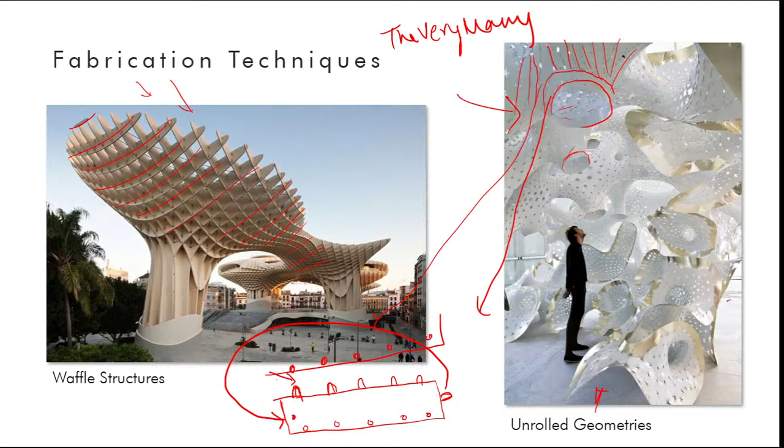I'm sure you all must have seen complex walls, parametric furniture, parametric benches, elevations, and whatnot using modern materials. We have been doing projects like that, but we don't want to showcase that because you already must have seen all these things. What is a bit unusual that we evolved at Equim is fusion of parametric architecture with vernacular or sustainable design.

An opportunity presented itself before us last year, and we had to design a resort in Noida. That resort had only one constraint: it was an agricultural site, and we were not allowed to do any concrete construction on it. So we could not use shell, concrete shells, which is the most obvious choice for parametric shells. And we could not use space frames because again it would require some sort of concreting.

So we resorted to bamboo. We started thinking how we could use bamboo parametrically to create something interesting. So we started designing these forms.

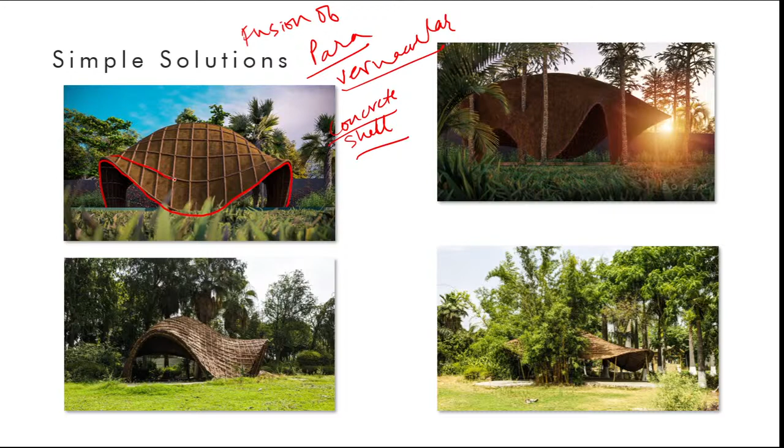These designs were made in Rhino and Grasshopper, and these were tested against the wind pressure because Noida receives cyclonic winds during monsoons, and in summer the temperature reaches around 50 degrees Celsius. In winter, the temperature reaches around 2 to 3 degrees Celsius. So a lot of temperature change, and also very heavy rains during monsoon.

So we had to ensure this structure sustains itself. We simulated wind pressure, sunlight - towards this side is the stage, towards this side is a very grand fountain - and then we made these structures, and the drawings were exported.

These bamboos were sent out to fabricators to bend, and we received these bent structures. You wouldn't believe that the construction began around 15th of February, and by the time Corona hit us, lockdown hit us, these structures were made within 2 to 3 days.

Obviously, there is a lot of roofing that needs to go on top of this, and a lot of finishing that still has to be done, and the construction is paused due to the COVID situation. But we were very glad to see that even though the construction wasn't finished, it withheld all the cyclonic winds and monsoon pressures that we had this year in Noida.

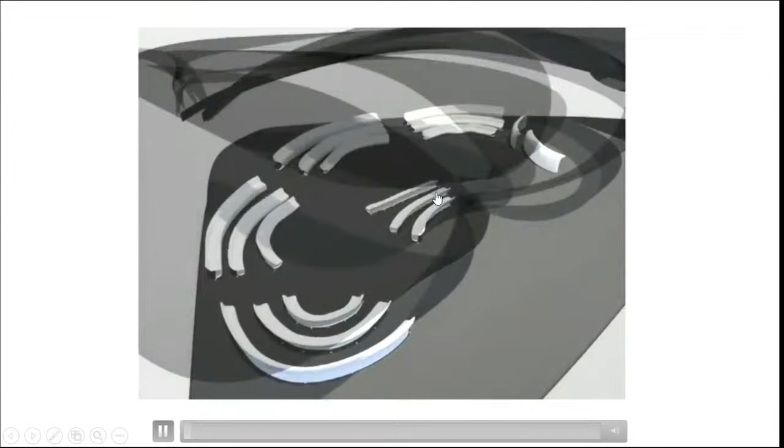So you see this furniture adapting and changing its shape in real time. The furniture, when the day started, looked something like this, with some group seatings, and as the day passes, some of the seatings become tables, some become walls or partition walls, and some become conference tables and conference rooms automatically, based on how these people are moving and interacting with it. So this is AI giving that control.

I'm not saying we are there yet, but we need to look forward to this. We need to start researching and developing these things, because big firms and big architects out there are doing it. We are not there in India, that's why we are lagging behind. Let's see what else we have.

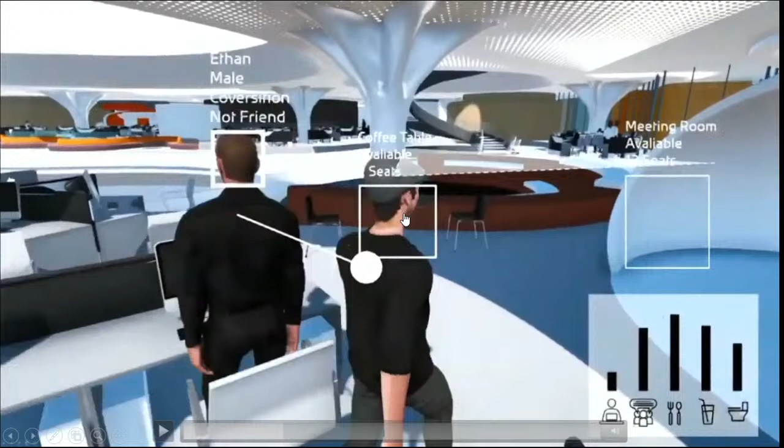So there are these kinds of modules of seats that attach with each other and can rotate. Now, this is an interesting one, in which through AI these humans are coded. If you have to design a floor plate for 3,000 office people, can you predict the movement of all 3,000 people? No. How will they respond during lunch hours? How will they respond during meetings? How will they interact with their bosses? You cannot predict that using your head, but you can use AI and the data available on social media to simulate that.

Now you see this person moving in the space, and this is being simulated through AI. You see he sees this person on his left, and it says 'Ethan, male, conversation, not friend' - he's not a friend. Let me play it again. So you see how he has to go to the conference hall, and he's seeing all these people and making decisions in real time.

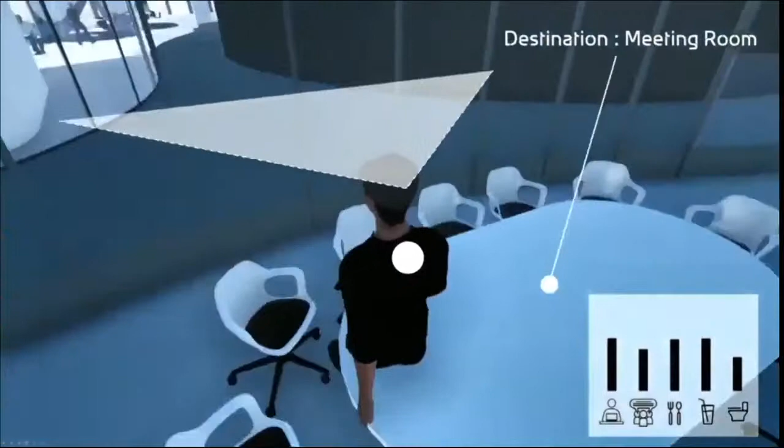Based on these decisions, we can decide whether the structure, the planning that we have done, is optimized for the users or not. Here we have 120 agents, and the total number of available workspaces is 142. So we are trying to identify the hotspots where collisions happen, where the traffic movement is the most. This gives us that idea.

Let's have a look at this one here. This person is moving towards the reception table, and we can see what type of furniture option, how a person will respond to the type of furniture that is available. We can also simulate all those things here, based on the surrounding and the design, how the people are interacting with it.

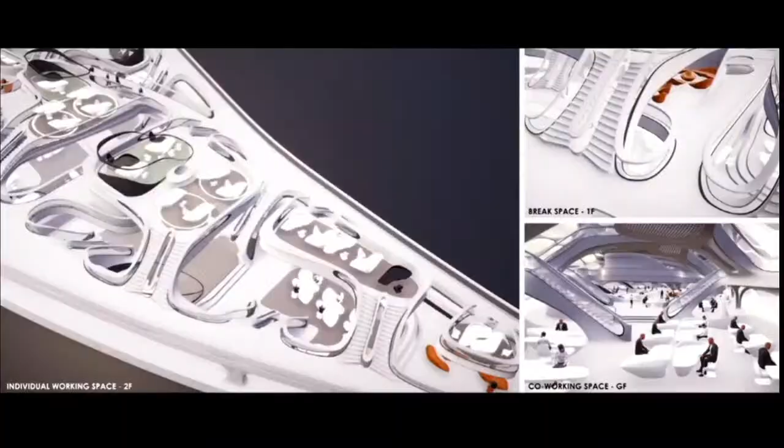This one again is an interesting one. This is a large floor plate where six workers and two managers are sitting in this area, five workers and one manager are sitting in this area, and there are four workers and a manager in this area, with multiple companies.

It's basically like a co-working space, so multiple companies are sitting here. Now we can never predict how each of them will respond with each other, but we can simulate it.

So let's simulate it and see how it's happening. From 9 a.m. to 10 a.m., when they are working, that's how they are sitting and working. Now 10 a.m. to 11:30 a.m. is when they start reporting to their bosses. See, these people are coming and how they will report to their bosses, how will they respond, with the context.

This is where current occupancy is 14 and a capacity of 80 is available. Now this is recess time or lunch time. You see a definite collision happening in the center, where different teams are interacting with each other. So we can never predict all these things using just our head.

We have to take the help of the computer. So let me just quickly end this presentation here.

You see, all of you those who have webcams, you can turn them on. What happens is, architecture is an evolutionary phase in India. Since our education is not up to that mark, we have been keeping architects away from technology, and we are moving into an era where technology is the biggest thing.

We are moving towards a future where Elon Musk's startup Neuralink just last month did its first test of integrating a chip within the brain of a living being, and he did it with a pig. Towards the end of the year, or mid of 2021, he'll start human testing. And 5 to 10 years down the line, we will become cyborgs.

Right now we cannot live 1 minute away from our phones. We are already cyborgs. So there is no point of keeping technology away from the designers. Designers of all fields are using this power, but us. So let's evolve with technology. Why not evolve with technology?

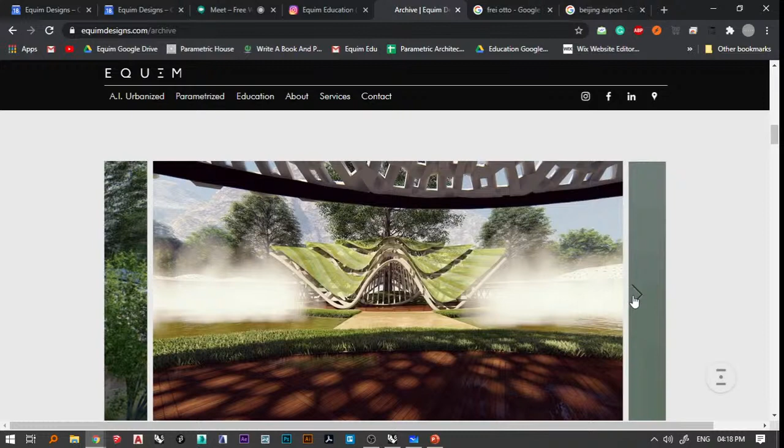And there would be a virtual exhibition. Let me go ahead and quickly show you the results of the recent workshops, how students have evolved through these. All the images you see on the screen are the works of students that accomplished it in the 5 days of the course. So you guys can actually explore these things.

We are sharing links in the chat box, so you guys can explore these. So we had these competition entries - if you have a look at these structures, that's how the students kind of evolved these forms. They had to design a school in this one.

So let me go back - this entry came first. We had architect Dr. Vana Sehgal to judge the competition, and architect Amit Gupta of Studio Symbiosis, one of the pioneers of parametric architecture in India, who gave a guest lecture in the previous workshops.

And again, if I go to the latest one that we just had, these are some results that the students have generated so far, and we are very proud to present these works because they learn a lot from these workshops, and this will change how the new generation of architects design structures in India.

Have a look at the complex structures that they were able to realize in the course of 5 days. That is what our approach should be towards designing. We have to evolve, we have to learn.